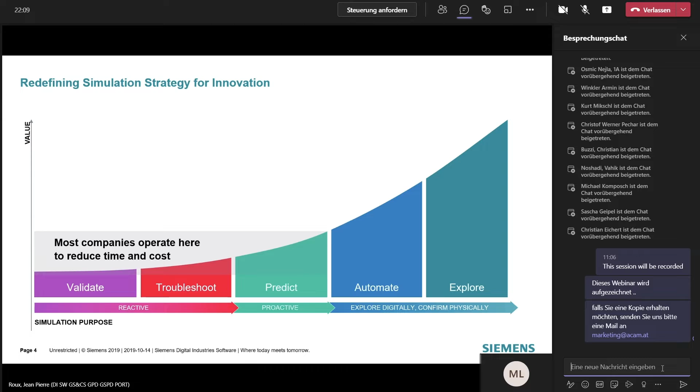So using simulation has of course enabled companies to operate with reduced time and reduced costs, because of course you don't need to do multiple prototypes over the development of a product. But now we are at the edge where, because you have methodologies in place, you could think about automating those methodologies, such that everyone is using the same, such that no human error is being done.

Automation means it could be run behind the scene on your computer while you're doing more added value tasks, not repeating them over and over when you're doing iterations. So automation would be the first step.

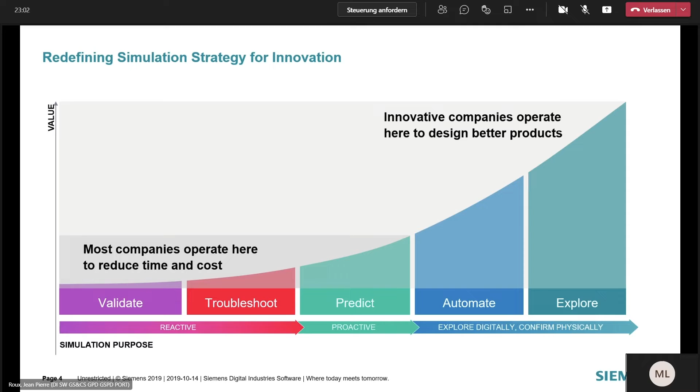Once you have automated your workflow, you could actually explore the design space with some smart search technology we will explain today. The idea is to have the engineer, the designer, spend more time on added value tasks, like analyzing results and trends, and not doing manual changes in design at every iteration.

This baseline design is maybe a kind of carryover from the former generation of your product, or comes from intuition from the designers, from the engineers, because they already designed the product. So you would start from this design.

You would create from a CAD, for example, a simulation model. You would apply your simulation methodologies, and then you would assess how it behaves, how good it is against the different objectives.

Based on that, you will do small steps, right? You will do some changes in the design, changes in the materials, all by hand. So either coming back to your CAD modeler or your modeling environment and making changes manually, submitting the different simulations, extracting the results, and again assessing how it behaves.

Doing this way, of course, does work. You slowly but surely improve the design if you do a good analysis of the result. But at some point, you will stop, because doing too many, you will be somehow lost with too much data, maybe, or you don't have time to do more.

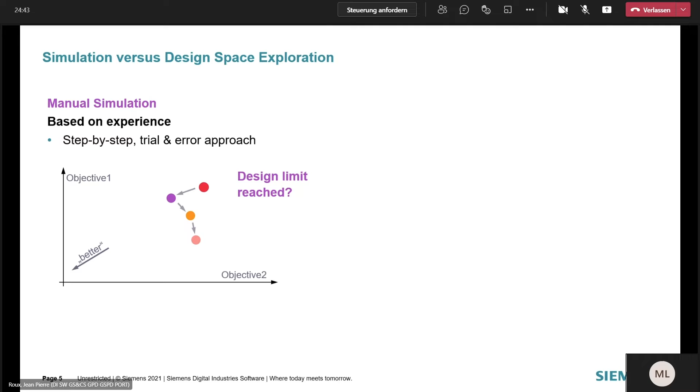But the question is, have you really reached the objectives, right? You never know, because you only had a chance to do a few iterations.

Also, we have to admit that our human brain cannot analyze results when you have too many changes at a time, so you will do changes of very few parameters, while your products have many design parameters from shapes, from materials, thicknesses, anchor points, or connection with other products, and so on. So as an engineer, you won't be able to change many parameters, and you won't be able to explore different combinations of those parameters.

On the other side, if you use what we call the direct parametric exploration technology, you will target first on defining what your objectives are, what parameters you will be able to play with, and then this is where it changes.

You start from your baseline design, but then based on your input, you use some smart search technology, automated, that will cover the design space and bring you back more solutions that you'll be able then to make trade-offs from.

You will be able to make a selection. You'll be able to share more possible solutions to the product team, and make the right decision. Also, with such technology, you'll be able to address more parameters, and the more parameters you play with, the more chances you have to find the best combination of them.

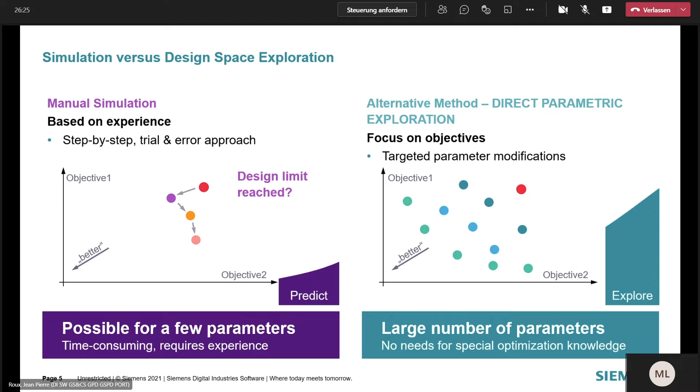Improving meaning you want to improve the thermal, the cooling behavior, the cooling performance of this cooling system, and at the same time you want to reduce the mass. In that particular example, mass being an attribute which is very important in many industries.

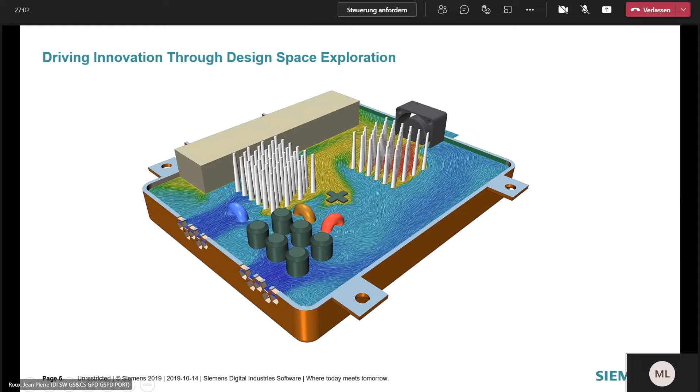The parameters are the following: the fan, which is this black part on the upper right, the heat sinks, those little pins that help dissipate the temperature, the thermal field, and then you've got the vents from which the forced air is being evacuated.

So those are parameters you could play with. Starting with your first design, you will build your simulation models, your modeling environment, submit a first simulation, and then extract results based on how it behaves. Again, you will do some changes maybe on the vents, geometry or locations, and you'll improve.

But now, if you look at this approach where we have created automation on top of the initial model, you can explore much different avenues, much different combinations, even changing the geometry of the heat sinks, the number of those pins, and so on.

You'll spend more time into analyzing the best design that's been found by the technology, and you spend less time into changing by hand for every iteration - again, the variables, changing the value, changing the geometries, and so on.

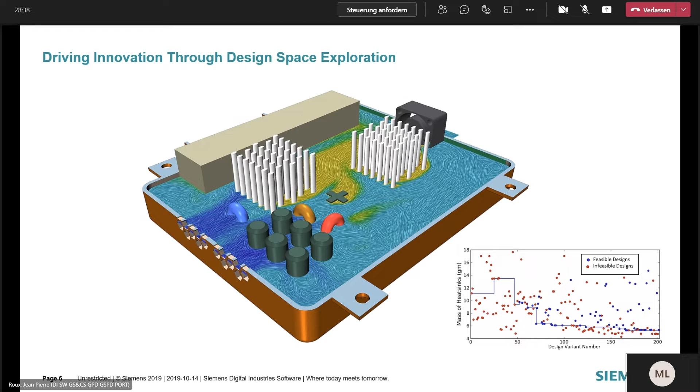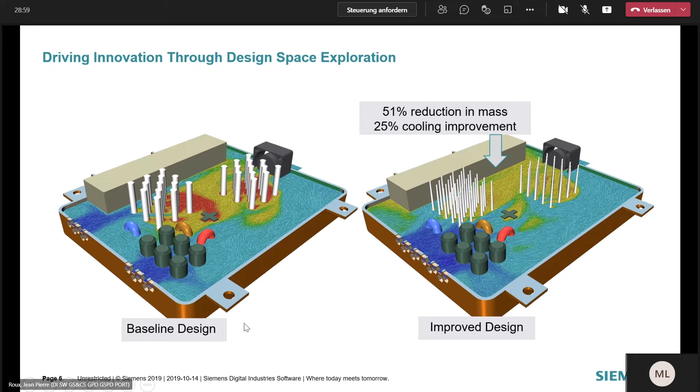As an outcome, in this particular example, we've got a drastic improvement in mass and in cooling performance as well. You could say, well, maybe I could have found this design, maybe not. But it is already very complicated to change many things at the same time. You see that here the heatsink geometry has changed, but also the fan location and so on.

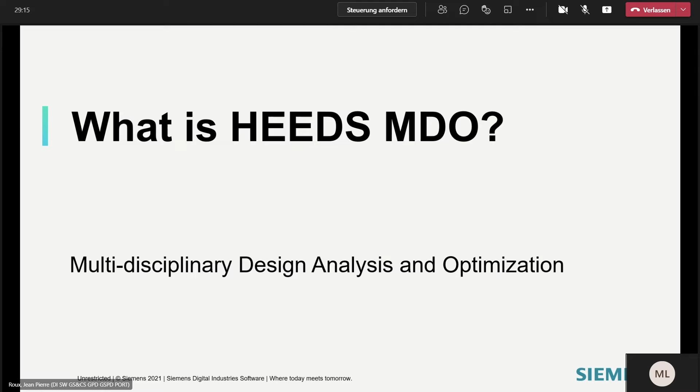Now we have a rough idea of what we could do with automation and smart search technology. Let's look at how Heeds MDO does address that. So what is Heeds MDO? This is what we call a multidisciplinary design analysis and optimization software.

It's an open platform, as we will see, that will help designers and engineers to find more satisfying solutions for meeting the requirements.

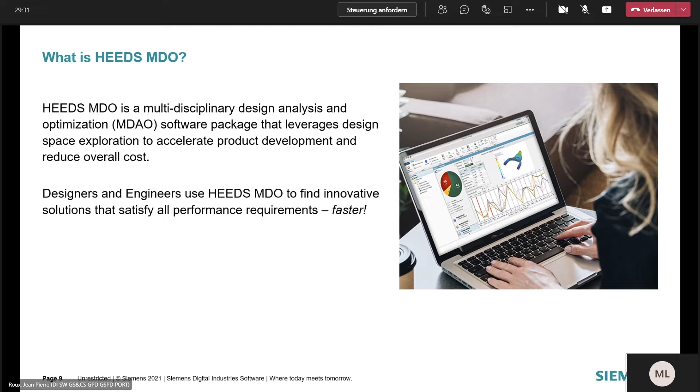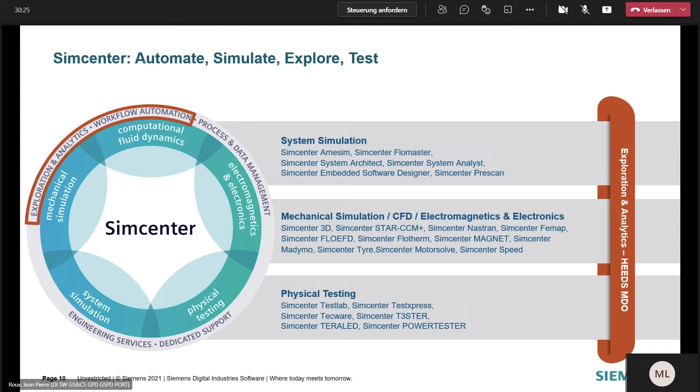So again, those connectors help to execute automatically a tool, execute their journal, so the different tasks, help to automatically extract data, pictures from contours, for example, or tables or charts from the results out of those tools.

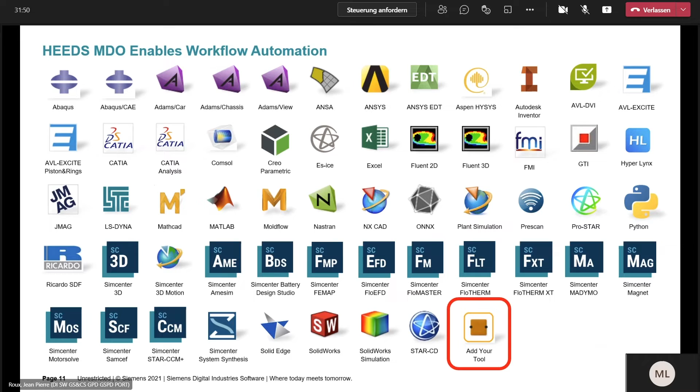So the idea is that we try to make it easy to create automation leveraging your current tools being used in your company. So there are four key pillars in Heeds that are being leveraged to create automation and design space exploration.

So that could be, you will start from a CAD, then push it to the simulation tool, then extract some results and go to another simulation tool to simulate maybe a different physics. And at some point you may do some specific post-processing in Excel.

All of that you will teach it to execute, and once it's executed from left to right, you will save it into templates. So that's how you're creating the automation, just basically re-executing what you're doing today by hand. We capture it into Heeds.

You can see here that we can do serial execution, but also parallel execution, meaning that for a given design, we can tell Heeds to evaluate its performance in terms of CFD flow, for example, and at the same time evaluate the same design for thermal or mechanical requirements, and then other analysis. So that means serial or parallel execution of different physics.

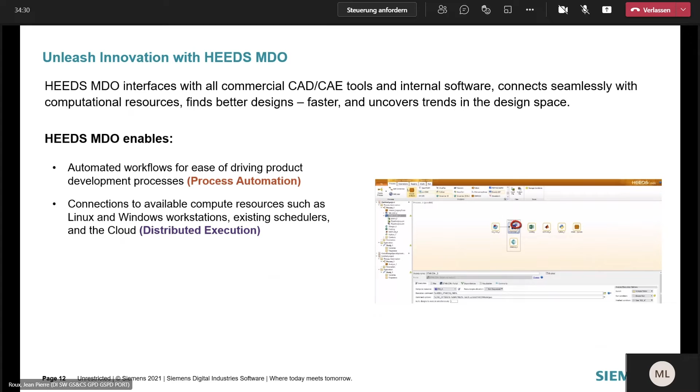So once you've created the automation and defined your strategy for where you will run the automated workflow, you will define a strategy of how you will search the space. Here we will focus on driving and using our proprietary search technology called Sherpa.

And this will help you to perform what we call single objective optimization or multiple objective optimization. Basically, you will define objectives, you will define constraints, and of course, you will define parameters with lower and upper boundaries.

And those parameters could be any parameters in a CAD file, so that could be shapes, CAD parameters, or any parameters you have in a simulation file. So that could be basically anything you have in your model.

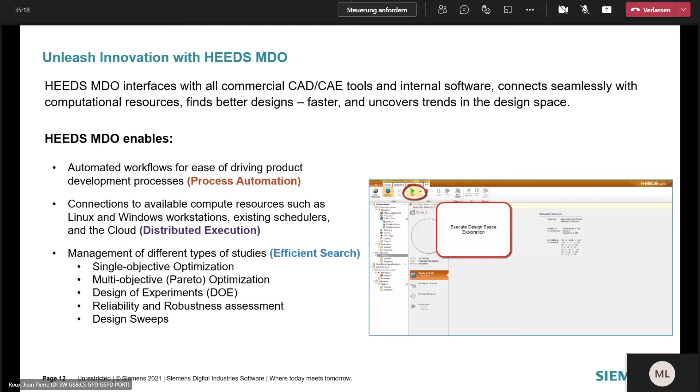Last but not least, this is the last pillar, and this is actually where our engineers and users are spending time. They're spending time not in changing manually parameter values for each iteration. They're spending time into analyzing the results that came out of the study.

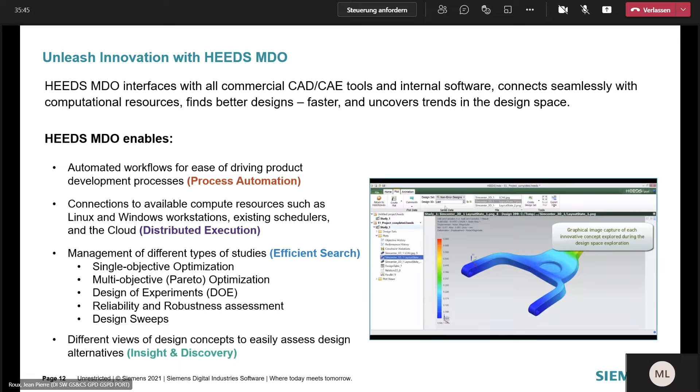And you can see in that video that actually everything is self-contained in Heeds' post environment, where you can visualize for each design that's being evaluated everything you asked for when creating the automation. So that could be just tables with values, that could be contours, that could be graphs.

Everything can be synchronized again in a single window, and you've got multiple tools to mine into the data, help you understand the trends, and narrow down to the one or more efficient designs you would like to submit to the other people involved in designing the product with you.

So that's the idea. Again, spending more time analyzing results and understanding trends rather than spending time changing by hand the value of parameters or shape of a part.

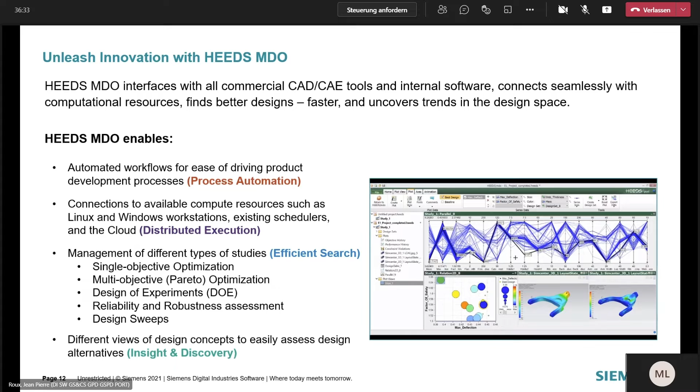Talking about exploration itself, one of the key components, of course, is to leverage optimization techniques. And here Heeds comes with specific ingredients.

Just to not make it too long, the idea is that we want to oppose our proprietary approach to what is the traditional approach that you can find on the market for more than 20 years. And this traditional process actually has, let's say, numerical limitations, to make it short, in a way that you won't be able to tackle the complexity of a real model.

It means that if you start from your real model, immediately you will be asked to make some simplification, meaning either reducing the number of parameters, which means that you will have less chance to find a good combination. The fewer parameters you have, the less chance you have to have a good performing design.

Or you will be asked to create what we call a surrogate model or response surface model. Some of you may have heard about that, which is a mathematical approximation of your real model, which requires learning and has to be handled very carefully because this is an approximation of your real model behavior. Then you will have to select an algorithm.

And the good news is that there are lots of good optimization algorithms coming from the academic world. But the bad news is none of them works well for every problem you will be willing to solve. So you will have to build your own expertise to know which algorithm to use and when to be efficient.

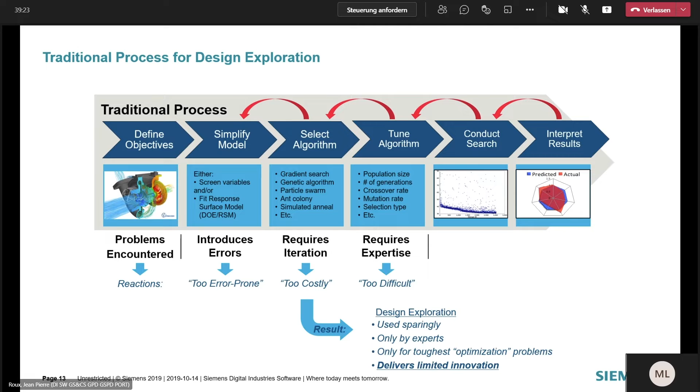So what you see here are quotes from companies who have understood the value of automation, exploration, and optimization, but they've seen that it creates a lot of complexity. It can even create errors, and at the very end, not everyone could use it. So that's where Heeds came from.

Heeds came with this search technology that makes it easy, while very efficient, to search the space. Basically, with the Heeds integrated optimizer, you'll be able to keep your real digital twin, your real model, defined with as many variables as you need, and the technology will handle the complexity without dramatically increasing the time to solve that problem. And this is proven by lots of different clients using this technology.

I must say that we have in Heeds also the other methods from the traditional process, because people who know how to use it could benchmark inside Heeds with our own optimizer, but also this could be used in what we call robustness and sensitivity analysis.

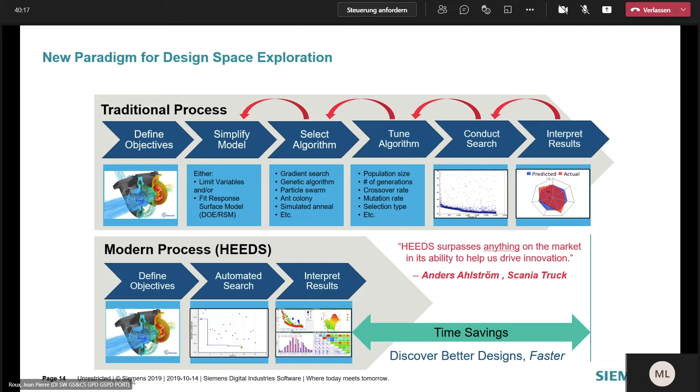But again, to put a figure, 95% of our clients using Heeds are using our integrated optimizer called Sherpa. And this Sherpa, just a slide on it, is a search framework. So in Sherpa, actually, you will find maybe 20, if not more, of those best-in-class academic optimizers. They are in there. But then Sherpa is using them in a specific manner, which is called hybrid and adaptive.

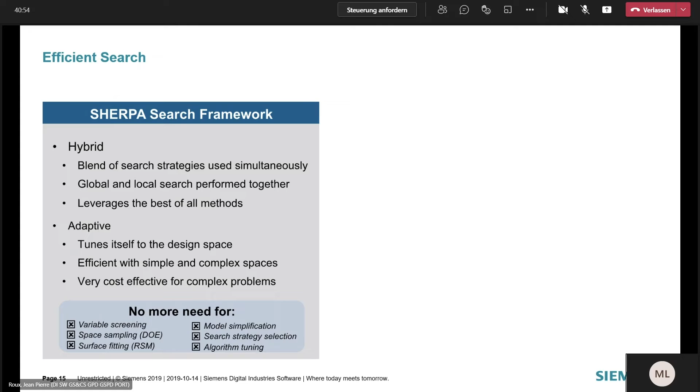Basically, what it does is use all the best of those optimizers at the same time, guaranteeing that it will search globally the design space and will be efficient in narrowing down those good designs.

At the very end, you don't have to focus on the mathematics of the optimization part of the approach. You just have to focus on how much time you will allow Heeds to conduct the design space study, and how much time you get to solve the problem. So Heeds will adapt to the budget you're giving, and will search the space and do its best to improve the design given the time allotted.

This is a start and stop process. Example: if you have 3 days before your next design review, you know that each design being evaluated with your simulation software needs 1 hour. You will need then 72 hours to conduct. You will have 72 hours, right, before the next review.

It means that you can tell Heeds, okay, now you solve this problem. Those are the objectives, those are the constraints, those are the parameters with the lower and upper boundaries. I allow you 72 evaluations, and you will adapt. You will adapt to search the space, and it will give you results.

From this, you will share improved results during your review, and you may extend. You may have some more time after this review, and you will be able to give another budget in the same study, and Heeds will restart based on what it has found. And using this new budget, we'll try to improve again and search the space to evaluate if there are more performing designs. So this is a very engineer-oriented tool, because again, you're in full control of the time.

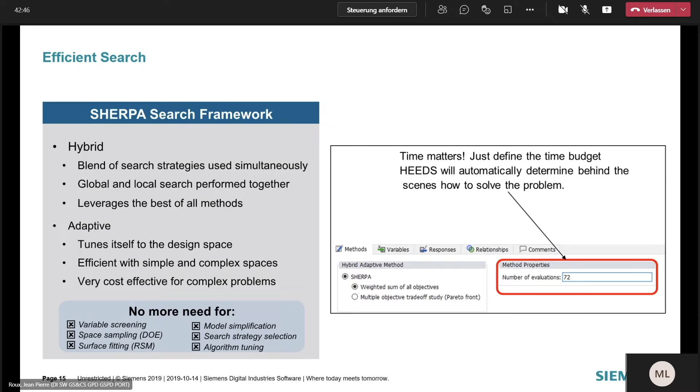Also, a very interesting feature is that you, as an engineer or designer, have intuitions and experience. Of course, this is how you will be instrumental into creating the study, into defining the parameters and the boundaries, into defining what it is you want to solve.

But also you can submit to Heeds at the beginning of the study, or at any time of the study, your own ideas, your own design, and Heeds will evaluate your designs and whether they're good or not. It will help it search the space, and give it some indications.

So Sherpa is not just like a cold sampling algorithm, just sampling the space. Actually, Heeds Sherpa is learning during the search of the space, so this could be put into the category of machine learning technology, because again, it will learn from what it finds during the study.

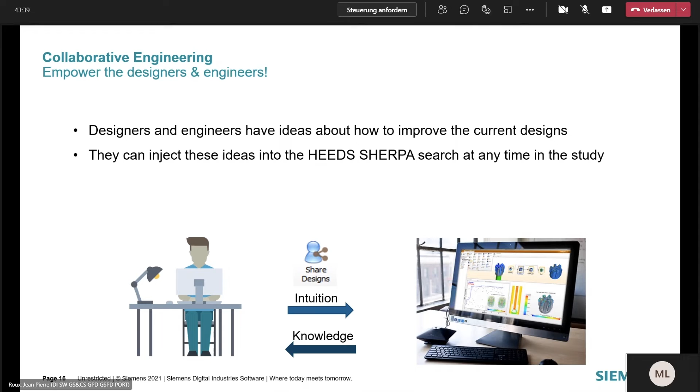So let's dive now into a detailed example, to give you a little bit of what are the different steps when creating a Heeds study. And after that part, we will cover quickly some different applications.

So here we'll be focusing on designing an electric motor, and for that particular example we'll be leveraging Simcenter MotorSolve. Traditionally, what you will look for is to increase the torque density and the efficiency, and minimize the torque ripple. So this is what you're looking for.

And what you would do is, again, create your digital twins, your simulation models. In that case this is a 2D approach, but it could have been 3D, of course.

And then you have variables. But if you do a manual approach and you have 10 variables, you will have a hard time to change them. Well, you won't change them all at the same time, because if you do so, you won't understand which variables had impact on the performance. You will change one variable's value and see how it goes, and based on the result, make some other changes. So you're doing baby steps.

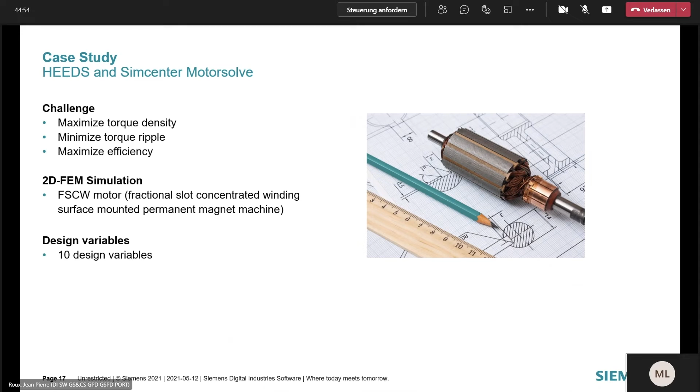Here, if you automate this using Heeds, you will automate the process. In that particular example, Heeds will drive an orchestrated execution of MotorSolve, and we'll also be automating the execution of Excel, in which some post-processing is being carried over.

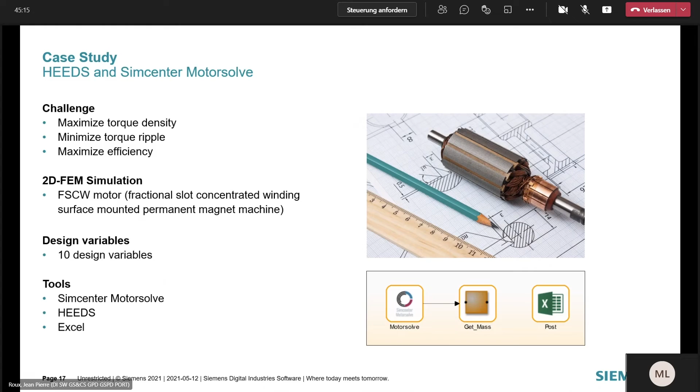And based on that, Heeds is looking at how it behaves against the objectives, and will change again the geometry of the motor and so on. And this is what you can see on those graphs. Heeds will be looking at the KPIs, so all the objectives you're looking for, and will adapt the geometry, adapt the search in the space to improve, again, the performance.

So again, all those things are running behind the scene. You have access to the data. You don't have to wait until the end of the study, you have access to the data at any time. You can pause it, stop it, as we said.

You can extract the value and so on, or you can let the study run behind the scene, and you'll be suddenly busy doing something else. Again, in the meantime, Heeds is doing the work for you based on your input.

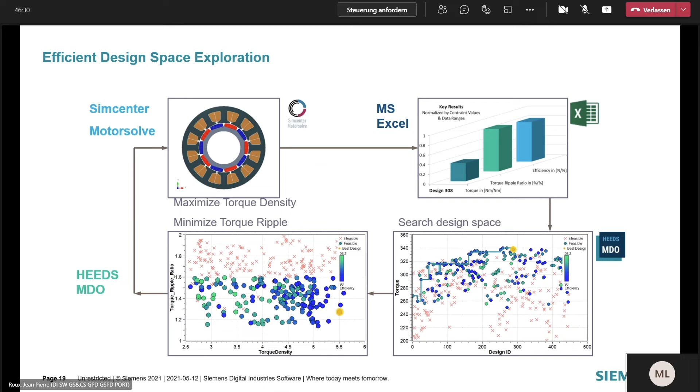Of course, your input is very important. In that particular example, 450 designs have been evaluated. You don't imagine you would do that manually, because you would be lost into the 'where is my data, how could I post-process that in a consistent manner?' So here, 450 evaluations have been done, for the matter of really searching the design space and finding the best solutions.

And best solution with an S. Again, the idea of design space exploration is not just to look at this yellow one, which is the best design. Actually, you will look at the yellow one, but at the same time you will look at those blue dots which are next to it, because all of them look to be very important, very good, with the fact that you improve the torque. You want to increase the torque density and decrease the torque ripple.

So the idea is that it's giving you not just one design, but multiple designs from which the team can make decisions, because the best design, this yellow one, might be the best design from the engineering standpoint, but maybe the one just next to it, which is performing well too, has a different geometry, and then the purchasing department or manufacturing department will tell you, well, this one is way cheaper to produce. Then this is the idea again: design space exploration gives you more performing designs from which you can make a final decision.

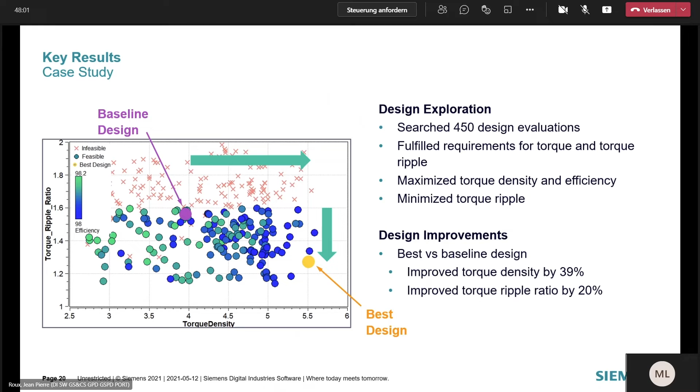Now let's look at a different application example. You could use Heeds to help you calibrate models, your simulation models, against tests. We have a specific feature where, if you have curves from experimental testing, you can put them into Heeds and make it so you improve your simulation model to match the curves.

So again, this is a small component, but actually a complex geometry. If you would do that by hand, you will start with the first design, see how it goes, and try to make some baby steps iteration, each time changing the geometry by hand.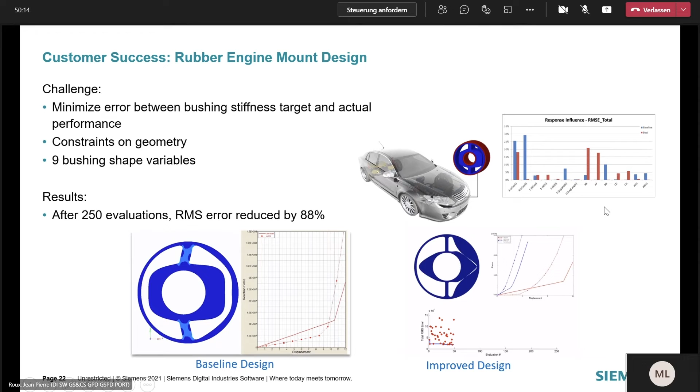Another one I wanted to share is calibration on a quite hot topic about batteries, a lot of focus now in the industry, ground transportation, but not only on batteries. Batteries are a very complex model itself, and here Heeds is being used to calibrate the behavior of the simulation model to some experiment.

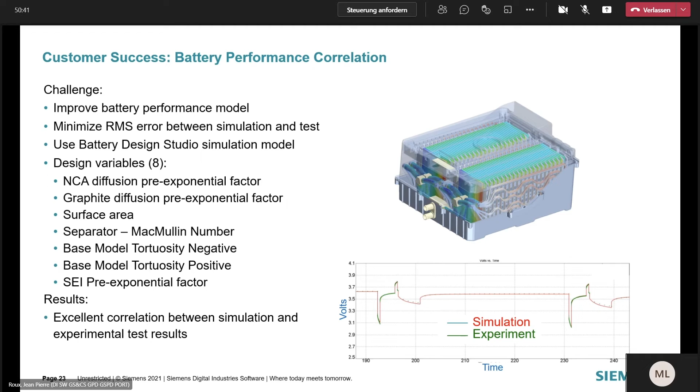Still in the electrification trend, here it's more at the system level. We will be talking about how to have an electric vehicle which has stronger acceleration, so let's say performance, but also has a maximum range. And those are two conflicting targets. I'm sure you're working every day into designing a product where targets are conflicting - I want it more robust, but I also want it to have less weight. So those are typical conflicting targets, and that's very difficult to solve.

Here we have as a base, as a simulation model, we start with a Simcenter Amesim model in that particular example, and the objectives are well defined as I said. Here we will be playing with 4 or 5 variables that you can access from the Amesim model. Heeds will explore the design space based on the different hypotheses set by the user, and will find for you the solutions, or families of solutions, that meet the requirements.

If you look at the upper right of the graph, you can see different clusters of solutions: red, green, dark green, and pink. Actually, those are all good solutions - they are what we call the Pareto front. This is the front where you cannot move beyond; you cannot do better than that, but all those designs are good, they're just clusters of different designs. The red cluster is one of the most performing cars, but they have a lower range, while the pink cluster is more moderate on performance but has a wider range.

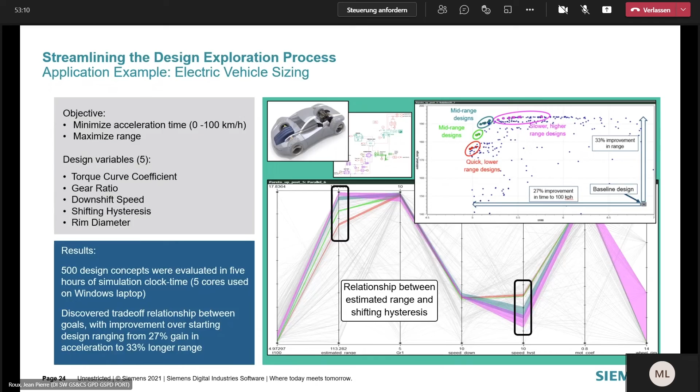I've selected this example where actually this is still using simulation, but not only for the purpose of designing a product, but also for the purpose of improving a process. So here we're talking about injection molding on a particular product, which is a syringe from Becton Dickinson.

Heeds here is automating the simulation, which is being carried over with Autodesk Moldflow. And design variables, as you can read, are variables that come from the process itself, right? Injection rate, pack time, cooling temperature, etc., with some tolerances. And as a result, here using Heeds, not only you will improve the product because the final mass is still within the baseline

but also you will improve the process time, and this by more than 30%. And this could be key, right? Meaning that if you reduce by 30% process time, you will produce way more parts per day, and so on. So that's a great return on investment.

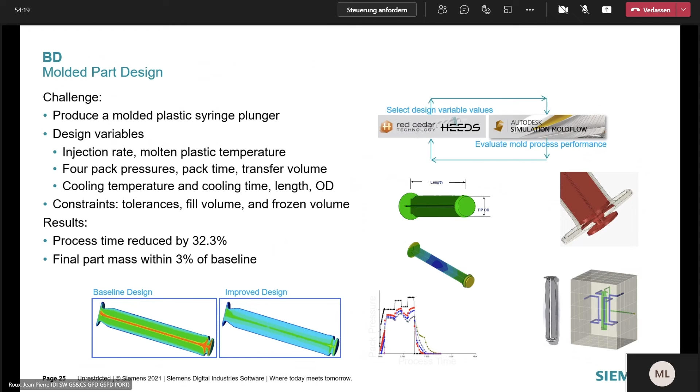One of the last examples I wanted to share with you. Here we are dealing with some bigger system. We're about designing turbines, and we're focusing on the combustion chamber. So this is where actually there is a lot of heat, and there are some hot spots, and those hot spots, potential liner cracking will appear over time, right? And usually what the designer would want to do is try to minimize those hot spots, and for that they're playing with the dilution holes geometry.

Dilution holes being how in the end the fluid will be pushed into the combustion chamber. So the geometry of each diffusion hole will change how the flow will be put into the chamber.

So this is quite a complex problem and quite a long time to solve. And that particular client, they were actually doing things by hand, doing manual iteration. So they would start with the first geometry in PTC Creo in that example. They would then export the geometry into Simcenter STAR-CCM+, create the CFD fluid thermal analysis, they would extract the temperature field and integrate it as starting point for thermal stress analysis in ANSYS.

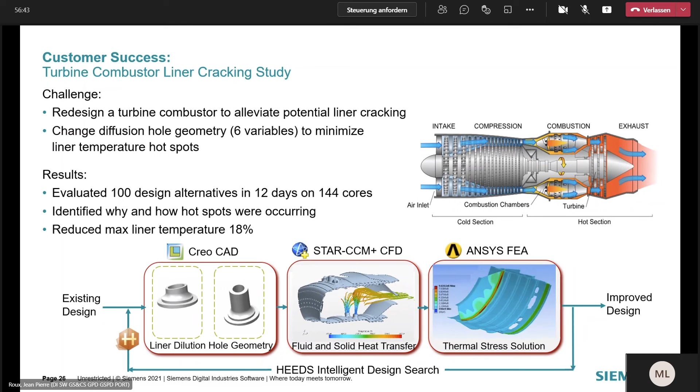If some of those of you are working more in the aerospace, well, Heeds is agnostic of any application. You understand that now. Heeds is actually executing and orchestrating execution of different tools. Those given tools are executing the simulation.

Here, we're dealing with designing an aircraft wing and quite complex simulations because you have to deal with lots of margins of safety in terms of constraints. You have a lot of requirements and variables could be, like in that case, the stiffener variables that you can see on the video.

It could be also the wing skin. And here what Heeds does, it explores, again, the different geometries and thicknesses for that particular wing to meet the requirement. What is interesting to look at on the graph, the plots you can see

it starts with, if you can see it, a red point, meaning that the first design was not feasible. It was violating one of the constraints, certainly on the margin of safety. But anyway, that was the starting point. That was the baseline design.

And you see that here we're tracking the mass because, of course, we want to find a good geometry for the wing, but with reducing the mass. But you can see that at the beginning, Heeds is increasing the mass to try to find feasible design, and it starts to explore and learn from the design space.

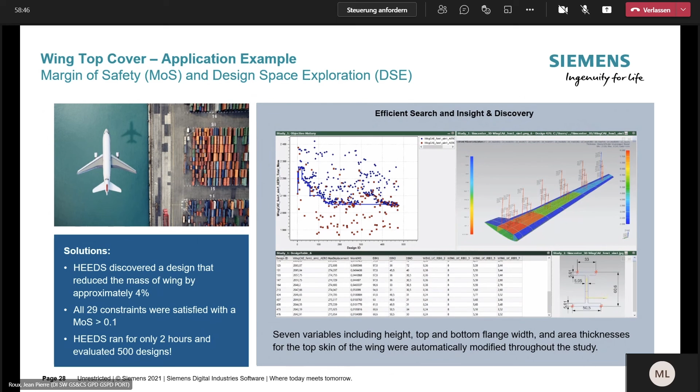I think this is the last example I wanted to show you: you can simulate for product, you can simulate for processes, but also you can simulate how to improve the layout of your plant, production plant, logistics, or warehouse. For that, you could use Plant Simulation from Siemens. With Plant Simulation, this is a discrete approach, a discrete modeler and solver. You're able to simulate the behavior over time of your assembly lines or production lines and so on.

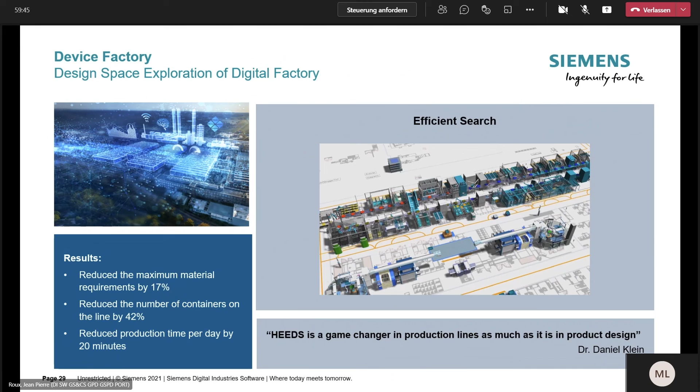Once you have your simulation model, you could use Heeds exactly the same way as we've defined earlier. Heeds will help you actually to find the best layout or timing and so on, to improve the performance of your production line, assembly line, or warehouse.

In that particular example, the outcome of this study was tremendous, because there was a reduction of material required, reduction of containers required, but also, as you can see, 20 minutes per day of production time was saved. That's enormous in terms of how much euros it means for the company.

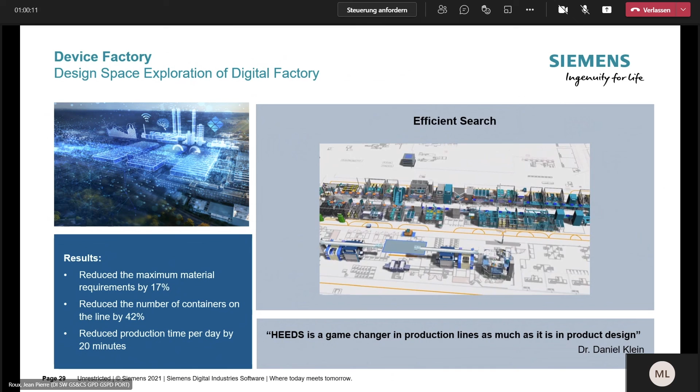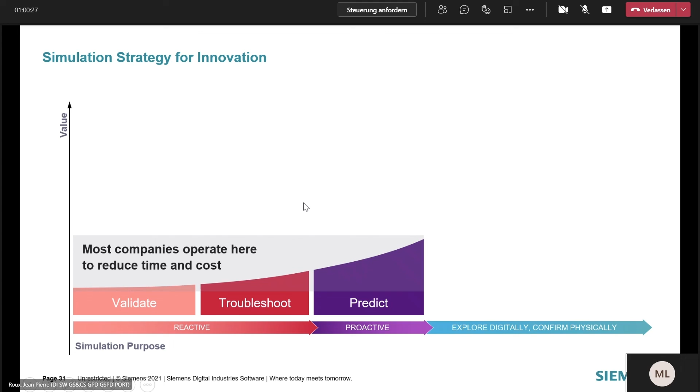I think this is the end of this presentation. I just want to again summarize with the fact that all companies now operate using and leveraging simulation. That is fine, but now we can bring you to the next level.

Creating automation means that you will be able to capture repetitive tasks. Maybe for the product you're doing, some of the tasks are always the same — you've got a new client request, you will perform the same simulation, and doing it all by hand takes time. You can capture it and automate it.

And then you can leverage smart search technology. Here with Heeds Sherpa technology, we make it easy and efficient to search the space. You don't need to be an optimization guru to use that, and you can trust this is a very well working technology being used by many companies across the globe.

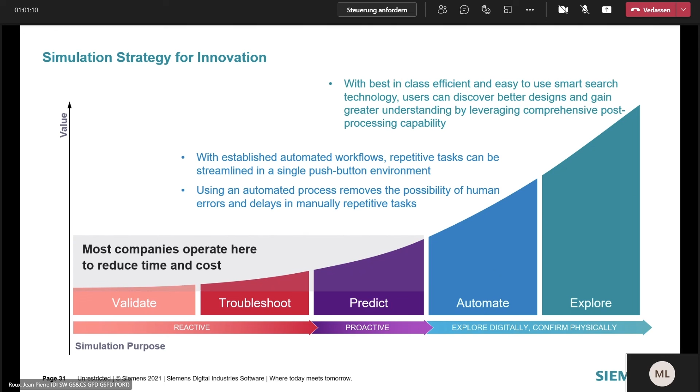Key pillars: as I said, you start with creating the workflow to automate the process. Then you will define your strategy for where you will run this process — could be a combination of local computing and remote computing. Then you will define the search problem you want to use for exploring the space. Last but not least, you will use all the data mining and post-processing tools you have in the Heeds post part to discover the best design for your company.

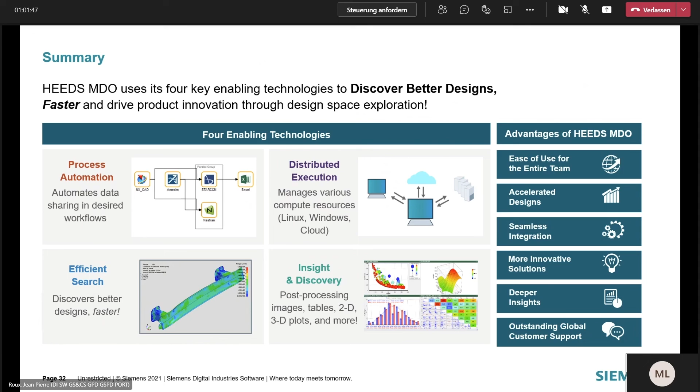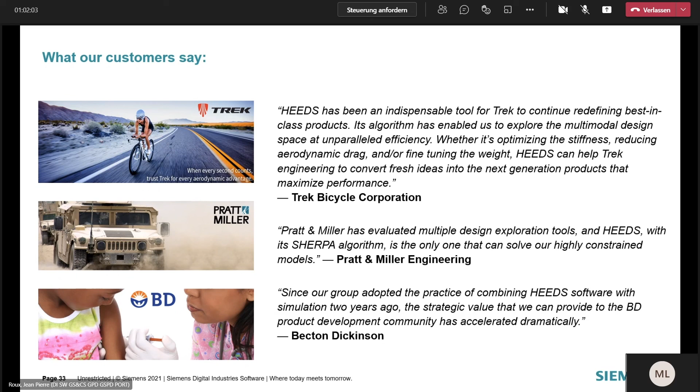As I said, Heeds is being used by very different clients from different territories, for different applications, different industries, but they all come with the same word finally: that this is a very easy to use solution. But easy doesn't mean inefficient — it's easy and efficient to use.

And I said easy because actually when you start using Heeds, you start by thinking about a first pilot project. You will just need one day of training. It's not like six days or one week — it's just one day of training, and you'll get all that's necessary to be able to use the whole Heeds solution.

Then usually, along with the training day, you would buy one or two training mentoring days, where we will help you set up your first design exploration project with your own tool on your own computation machines and so on.

From there you will conduct this first project, and you will be able to measure KPIs. And KPIs for Heeds, it's not about whether I can simulate a crash or simulate a turbulence model — this is not the Heeds part, this is the solver part.

The Heeds part is: I would do that in the past and it would take one week — now it takes one day. This is a KPI: development time reduction.

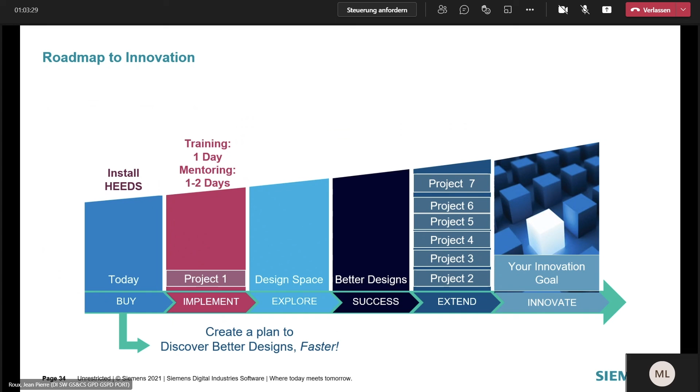And the other KPI, of course, is about the pure performance: I could not find a performing design, but with Heeds, I found a design performing 30% more. These are the kinds of KPIs you will measure, which help you create a business case for investing more in Heeds in your company.